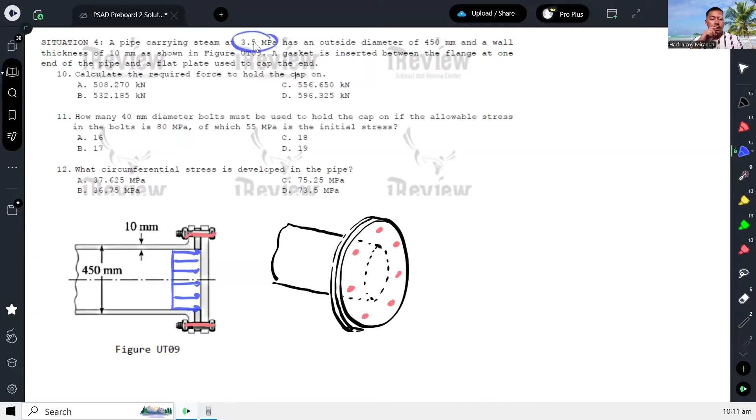Okay, so this is the pressure given times the area. Because the pressure acts like this, distributed around our section. So that's the magnitude of pressure times this area, which is the inside area of the pipe.

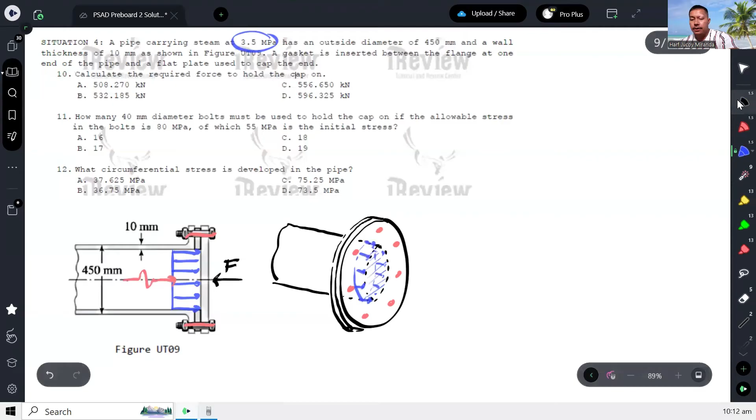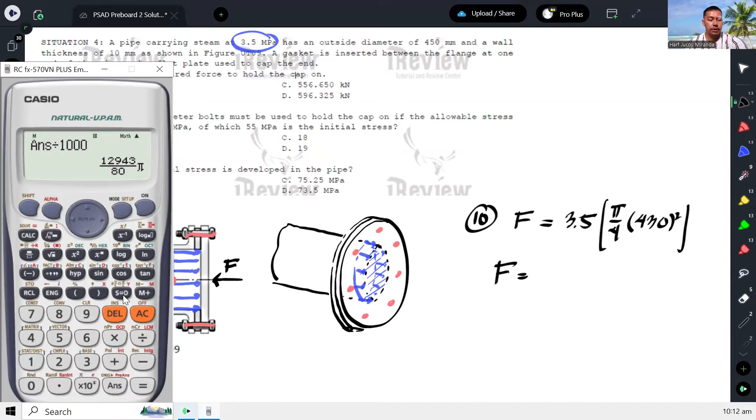So for number 10, our F is 3.5 times the area, which is pi over 4 times diameter squared. Take note, our inside diameter is just 430. So 430 squared. The equivalent force that we need to resist, in newtons, divided by 1,000 to convert to kilonewtons, gives us 508.27.

Next, how many 40 millimeter diameter bolts must be used to hold the cap if the allowable stress in the bolts is 80 megapascal, of which 55 megapascal is the initial stress.

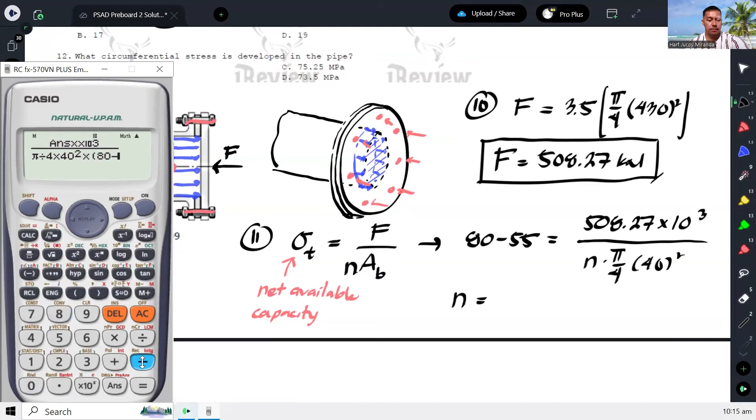So this will be 80 minus 55 equals, and 508.27 converted to Newtons, over N times pi over 4 times 40 squared. From here we can calculate the number of bolts, which gives us 16.18.

We can't just answer 16 because we need more than 16. So we need to round up to 17. So the correct answer here would be letter B.

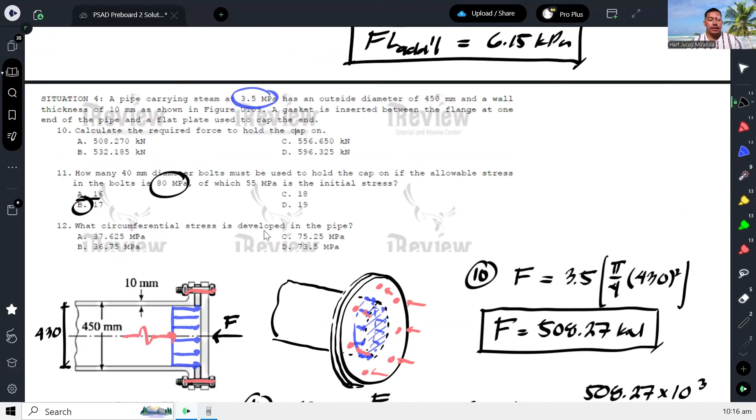Okay, what is the circumferential stress developed in the pipe? Since the pipe is cylindrical, we can use the circumferential stress, also called tangential stress, which is PD over 2T.

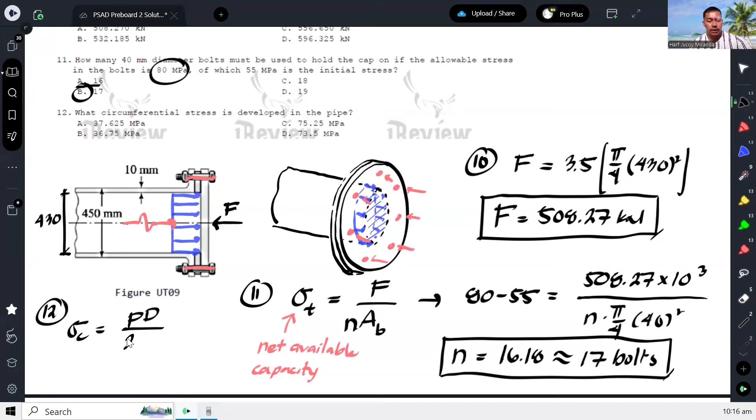I'll just emphasize that the diameter here is the inner diameter — the inside diameter. So when we calculate directly, our P is the pressure of 3.5, our inner diameter is 430, over 2 times thickness. So that gives us 75.25.

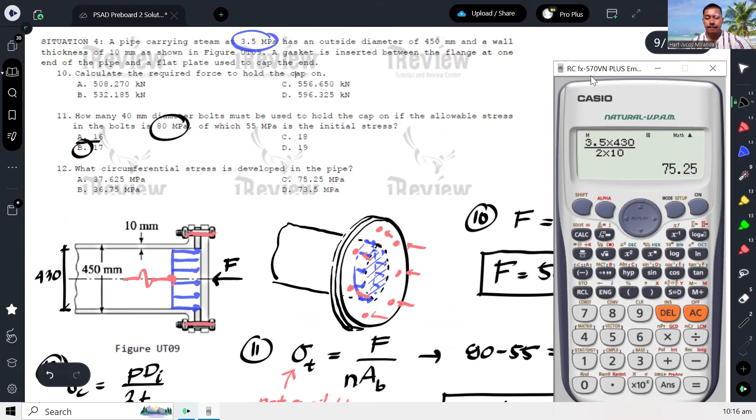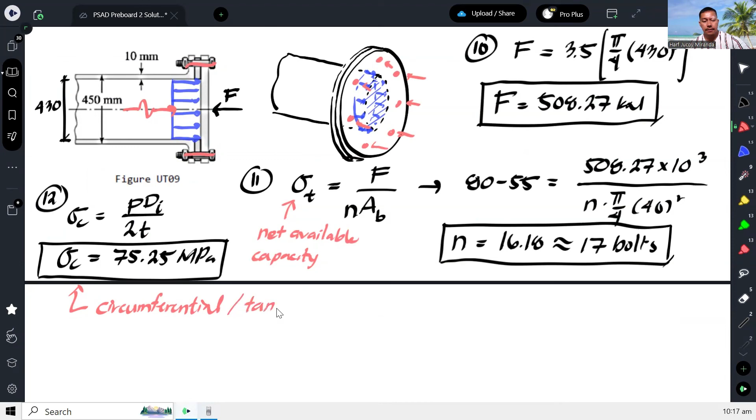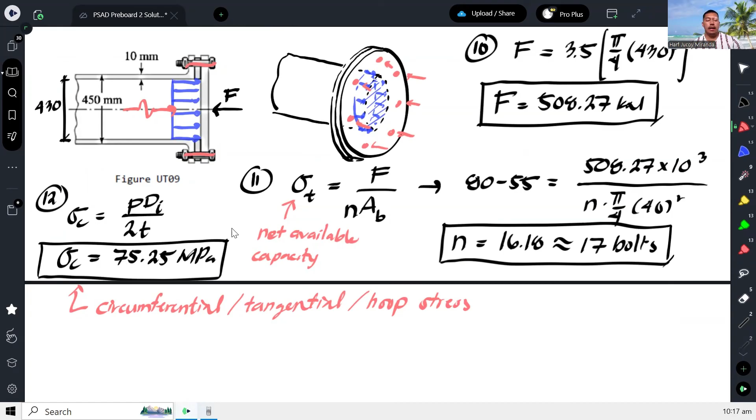Again, another term for this: circumferential, tangential, or hoop stress. They're all the same — PD over 2T — when it's cylindrical.